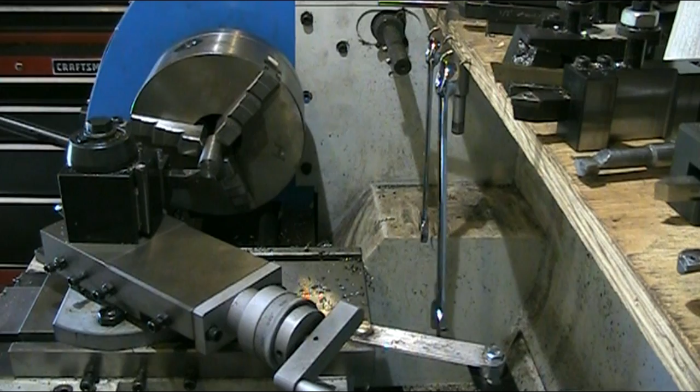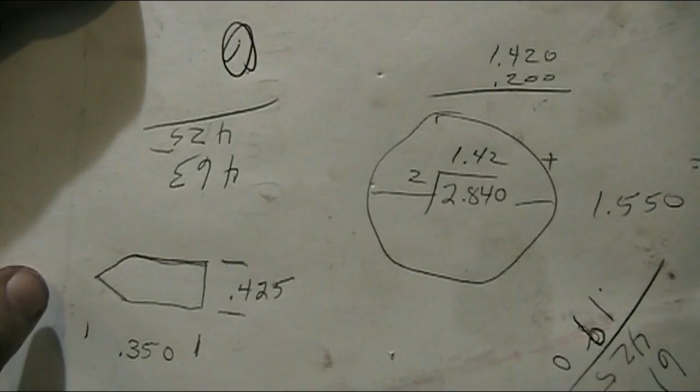Alright, now we're going to make our little transfer punch. I've got the compound set on 50 degrees. That'll give us a good steep 100-degree included angle when we make this. I'll quickly show you what I'm looking to build here. This isn't to scale, but it'll be 350 thousandths long, set down in the hole with just the tip sticking out, so we can transfer that hole center to our top plate. Diameter will be 425 thousandths.

We're going to put that angle on there first, a 100-degree included angle. I've got the camera backed up a little bit, so anyone not familiar with the compound, I have the carriage locked down now. I'll be using the cross slide to advance in, but the compound to actually cut the angle.

I'm moving in about 50 thousandths at a time. I left the diameter the full width of this piece I found in my scrap bin, just so it'll be a little more rigid. I'm actually cutting in both directions. This should give us a point on the end now.

Now we'll get that compound swung back around, which I normally have set at 30 degrees in the other direction. It really doesn't matter. That just gives a good location, seems to be a good in-between point, getting out of the way of the tailstock.

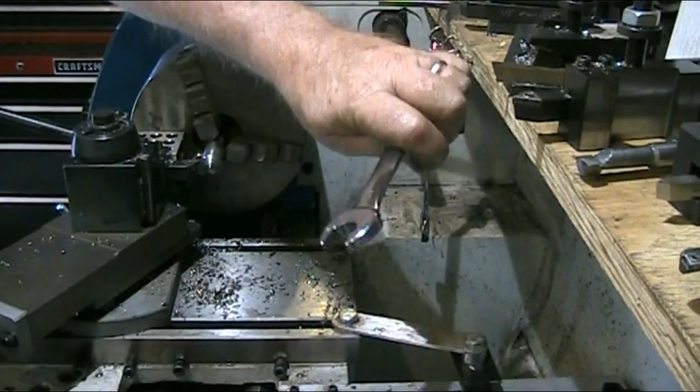Now while we got that loose, I'm going to go ahead and set that so it's perpendicular to the chuck, just using a 1-2-3 block. Now making sure my carriage stop is set where I shouldn't run into the chuck, shouldn't have any crash.

We'll get a small cut now, and then get a measurement and see how much we need to take off total. I'm cutting this considerably longer than it needs to be, just so I've got plenty of ample room there.

We got a lot to go, like it's obvious. That's 675, and we want 425, so that's 250 thousandths we want to take off. I'll zero out my DRO, and we'll take about 50 thousandths at a time off the diameter.

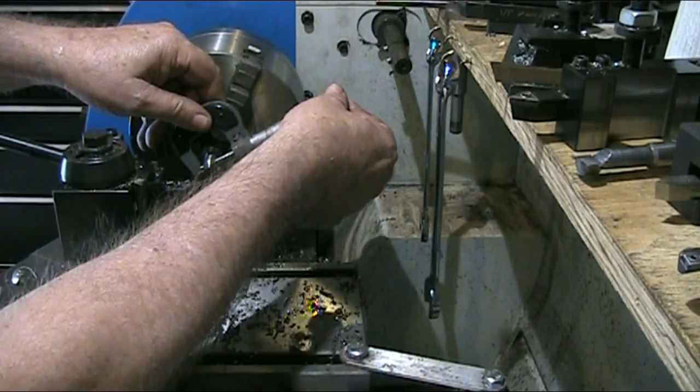I just don't want it too big because it's got to go down in that hole. That's about 6 thousandths over. I didn't think I'd set it right the last time, so... alright, that's 423 thousandths. That's good, that gives a little bit of clearance there.

Now we want to part this off, and if any measurement is crucial, this one probably is. All right, I've got the cutoff tool bumped right up to it. I'm going to zero out the Z.

We want total length to be 350 thousandths, so I'm going to come to 350, and then 100 thousandths for the thickness of the blade. All right, slow our RPMs down, and we'll part it off.

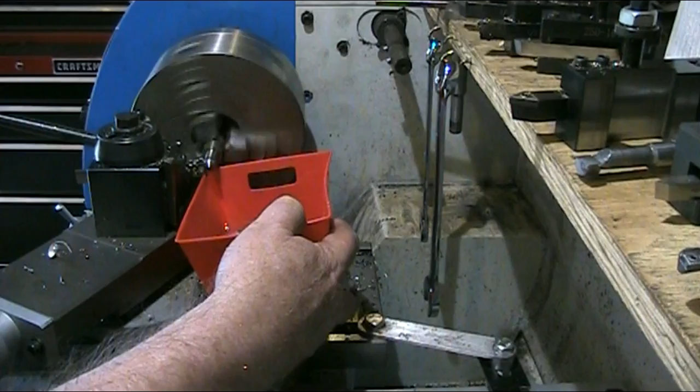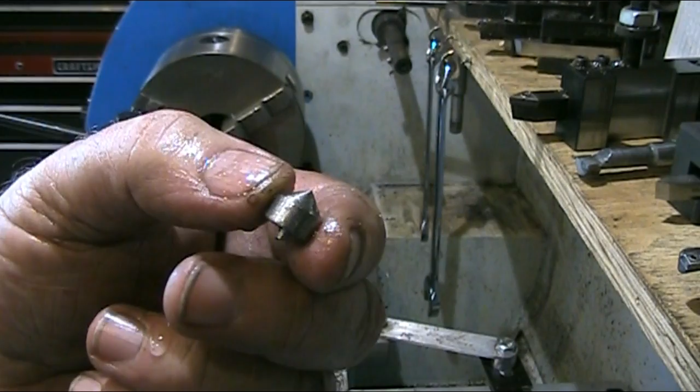Okay, there's what we were making. This will set down in the screw hole with just the tip sticking out, is the plan. That way we can transfer that hole to the top plate we made. That little tip left on there from the parting tool, don't even need to worry about sanding that off, that can go down in the hole, in the actual screw hole itself. This will be riding on the shoulder of the counter bore. So let me get the camera turned around, I'll show you what I'll be doing. I think maybe I got you close enough now that you can see.

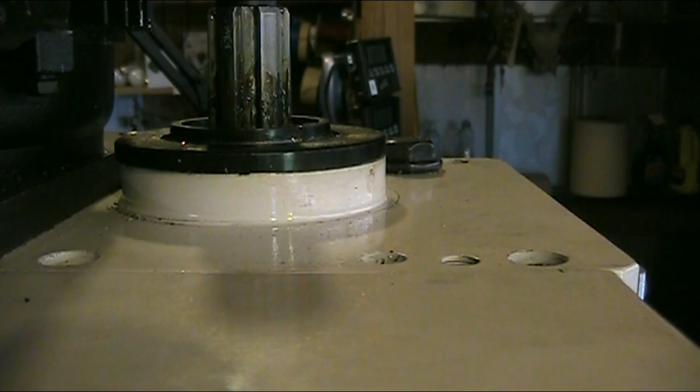Here's a little piece we made. I've got the socket head cap screw out of this hole. I'm gonna drop that in there, and it's just barely sticking up.

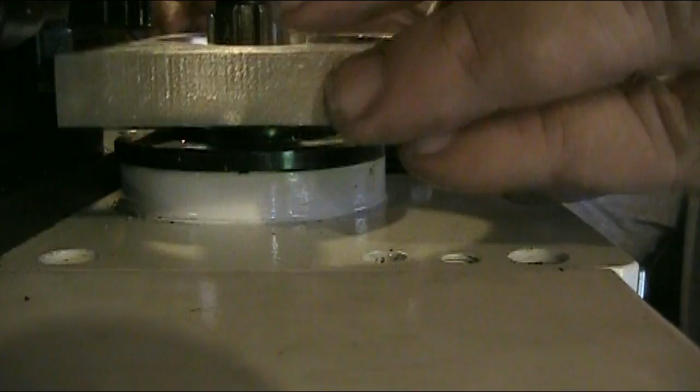We'll put our plate on there and give this a good tap, and hopefully that transferred that hole. Sure did, got a good transfer. Hopefully you can see it right here.

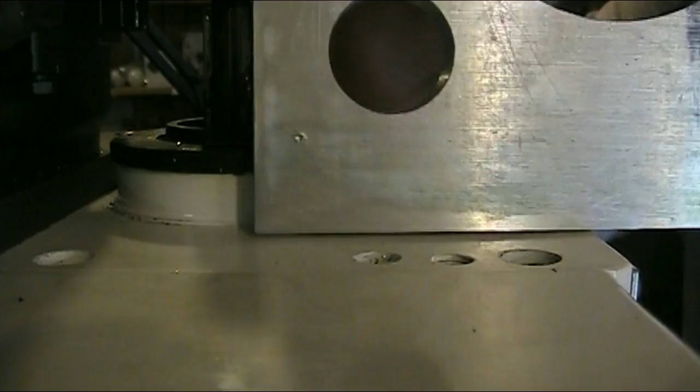Now I'm going to drill and counterbore that hole and continue that process one at a time around, all four.

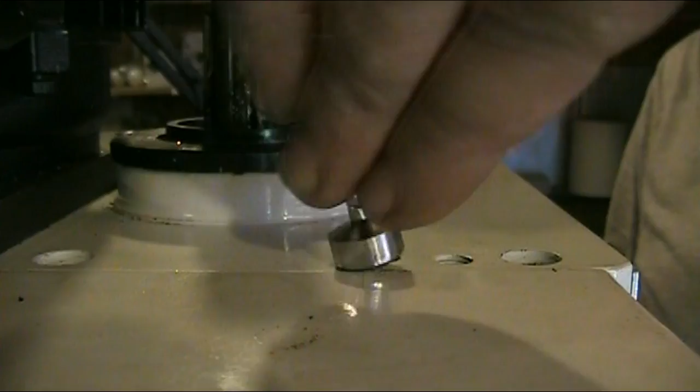Now I'll give you a little secret, see who's paying attention to all the videos. This is the second one of these I made. The first one, I had the intention of getting it out with a magnet. I did not even notice that the material I got out of my scrap bin to make that first one out of was stainless steel. I dropped it down in that hole, and of course stainless steel is not magnetic. I had the dickens getting it out of that hole, but it works so much easier when you use the right material.

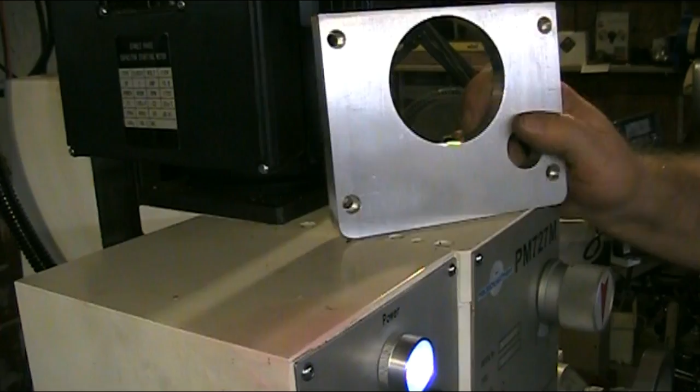Okay, I got all the holes located, transferred over and indicated onto the gearbox plate. Got them counterbored. One other thing I did while I had it out, I eased these front corners right here, put a little radius on those.

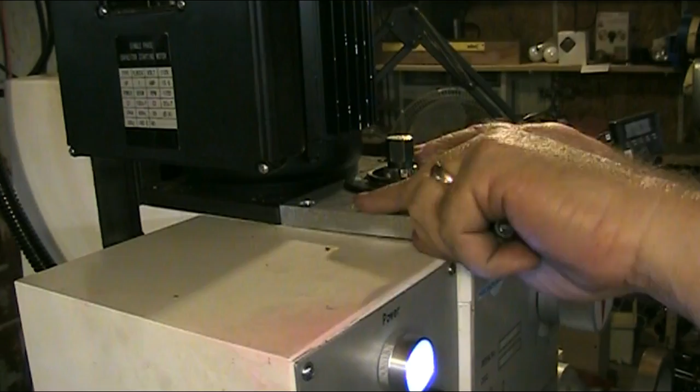I went looking for some socket head cap screws in metric to fit this, but finding metric screws around my neck of the woods on a Saturday, other than very common sizes, is kind of like finding chicken teeth. So it's not quite ready to mount yet anyhow, but it's from this plate right here that we'll continue to build our structure on up for the power drawbar. Everything will be mounted to this plate that we just built.

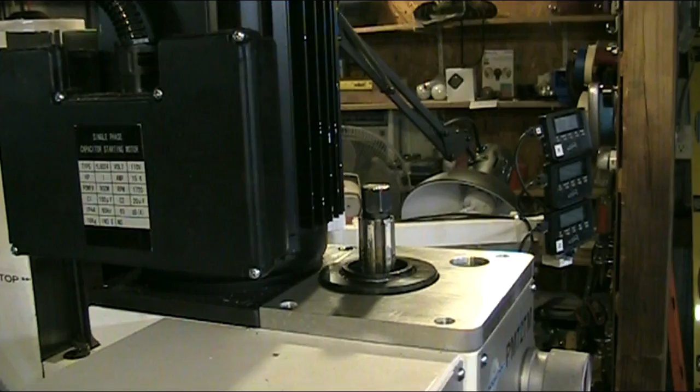Now that we have our gearbox plate finished and mounted on there, the next step, building this basically from the ground up, we need a circular plate or platform up here that all of our sliding mechanism is going to work on, and also our impact wrench will set up here.

As you can see, I got very little clearance right here, and I don't like modifying the stock equipment if I don't have to, but I just don't have enough room right here. So what I'm going to do is take the Dremel and cut these little fins right here off. There's just not enough clearance to get an upright up here.

I've got an extension on the air wrench right now, but the air wrench would actually be sitting down in this area. You can't really tell right now. We got clearance issues at the top as well up here, since the air hookup comes off of here.

We've got several challenges to work through on this, but I don't think any of them is going to be insurmountable. We just got to take our time and plan it out well in advance. These fins are going to have to come off right here, so that we can have a plate big enough to mount our slide mechanism on. There'll be two posts up here that our slide will work up and down on.

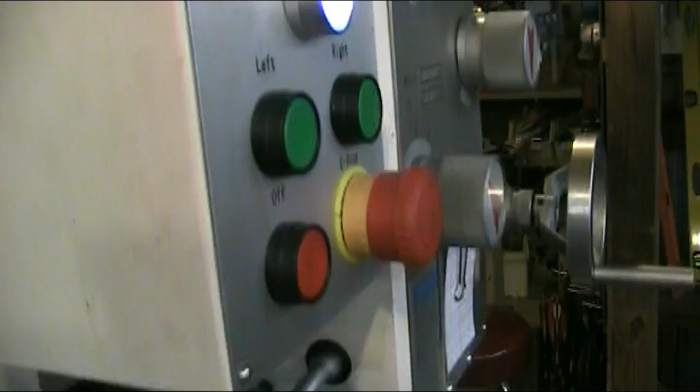So I'll drop the camera back down. I'll be taking these fins off of here, but I'm going to slide the camera back down now and give you a little bit of a drawing of what we're actually going to be trying to cut out here. Maybe that will show up on here.

I want my platform to be 4.5 inches wide. This is the center of the drawbar right here. I'm hoping you can see that okay.

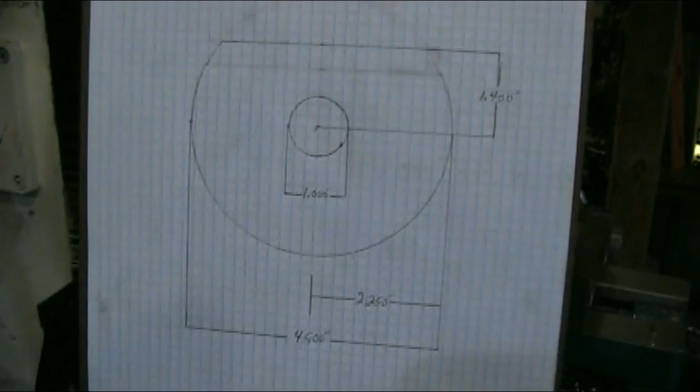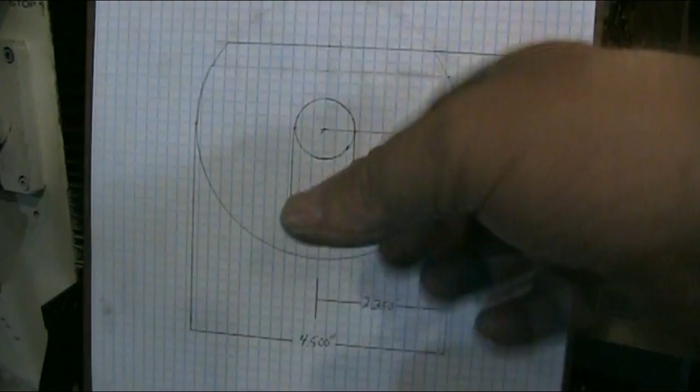All right, this is the center of the drawbar. If I take those fins off, I'll be back at 1.4 inches. If I don't take the fins off, 1 inch is all the clearance I've got. This hole here has got to be approximately 1 inch for the socket to pass through, and the drawbar to come up through if necessary.

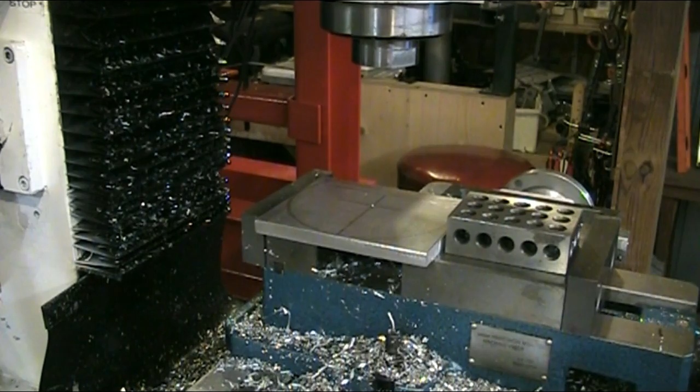So again, gonna make a circle 4.5 inches wide, but we're gonna clip off at 1.4 inches from the center right here. So what I've got in the mill right now is a piece of material. It's got 2 good edges on it now. Well, it's got 1 good edge on the back and a fair edge here, but we're going to see if I can find a...

Little piece of copper wire here, and we'll see if this will stay down. Looks like it. Yep, it's going to want to ride up. Well, that had a chip under it. That might have been what it was trying to ride up. Yep. All right, that should have it down now.

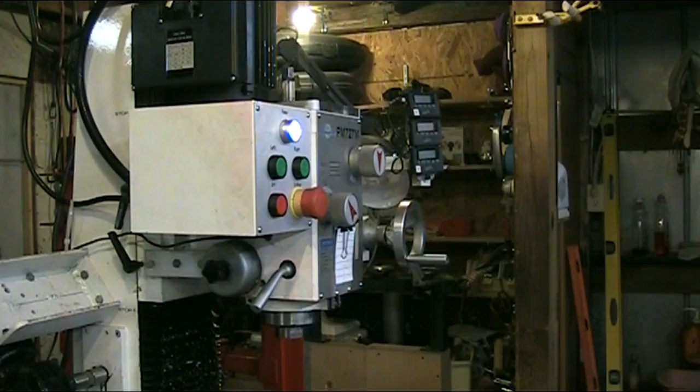For proof of concept, I'm going to handheld this by hand. Let me get the camera back here so maybe you can see what I'm actually doing. All right, I've got the camera backed out a little bit. I had to get some more length on my microphone cable and power cable to the camera, but hopefully you can see what I'm doing here.

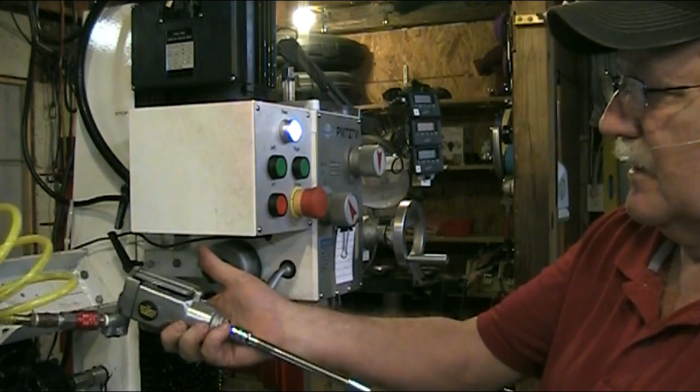For proof of concept, I have my mill, a roughing end mill, my 3/8 collet, and with the extension it's just going to be handheld right now. I have the socket on the extension now on the impact wrench. I'll set that up there.

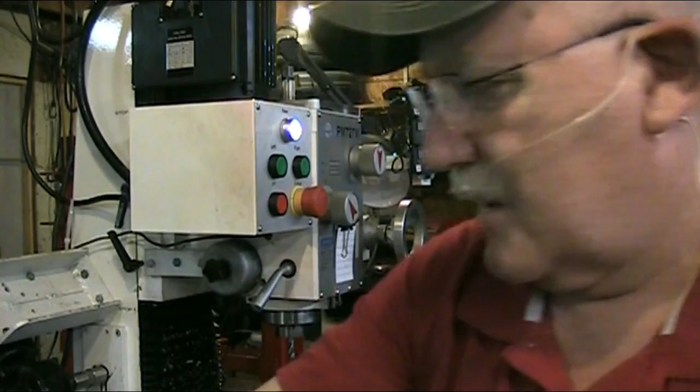Find my notch. Alright, that's in there now. And that is tight. Alright, so I'll leave that like that and see. I'll swing the camera back around to the filming position and we'll see if that tightened it up enough.

Alright, as I say, this is a factory edge right here, but I want to clean that up just enough. It's just got a few dings from where it's been tossed around in the parts bin and so forth. So I want to just touch that off enough. Also, I think I've got a good grip on it there, but we don't want to put too much pressure on it until we can get a better bite on it.

I'll move in just a little bit, tighten my X down. And I need to go down a little bit more on the Z. All right, that cleaned that edge up good.

Now let's come over and we'll get one of our perpendicular edges. I have the circle drawn off on there with a pencil, just to get a close edge. And the only thing I'm wanting to do right here is square this edge off so that I've got two good sides before we turn and cut this 1.4 inches off. This will be the precise cut on this edge right here.

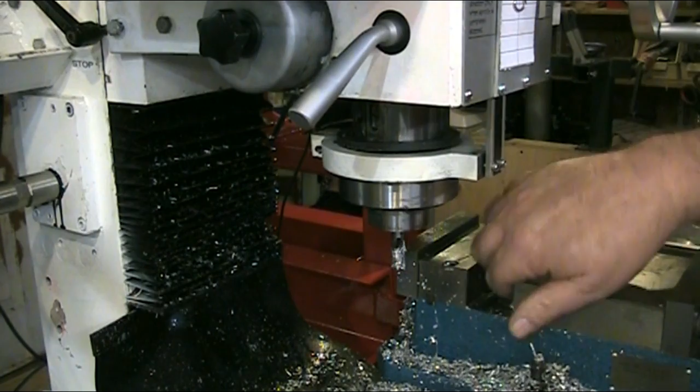Alright, that's all holding pretty good, or real good. Now I could turn this up. I've got the jaws on the outside of the vise now, and I'm debating on whether I want to stand this upright and mill this off, or if I want to just go ahead and put it in this way. I think I'm going to go with this. I've got two flat edges to work with there now that I can get a good grip on.

Now we want 1.4 inches from this center. I've got what's going to be the center of the circle, I've already got that laid out. So as always, I'm just going to get one little skim cut to get a measurement from. I know I've got a little bit to work with here. And I want to go back up on my speed just a little bit. There, I think that's better to cut this aluminum with.

Alright, the very spot I need to measure from didn't quite clean up there, so I'll make another pass. I'll turn my DRO on now. Take about 20 thousandths off there, just enough I know it'll clean up.

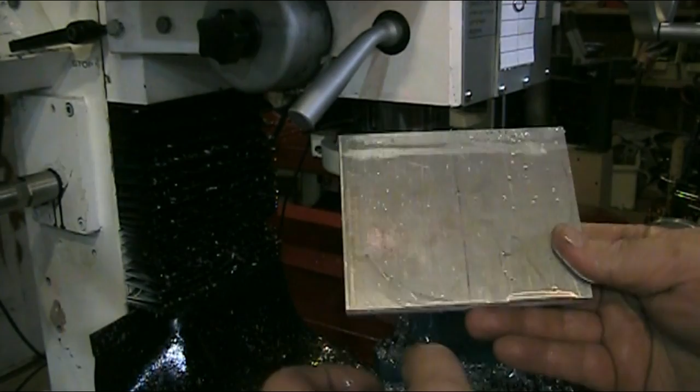Alright, when I get this back now, I'm going to carry it back to the workbench, and with a pencil and compass, I'll lay out my approximate circle before we go to the mill. It will be from this center point, lay it out, and then I'm going to go to the bandsaw and take off some of that corner, some of the big parts, so we won't have quite as much to turn on the lathe.

Alright, didn't think to mention it before I took the material out of the mill, but the impact wrench sure tightened the collet enough to cut this aluminum, and I believe it is probably as tight. I may try it with my hand wrench just to see if it feels about the same amount. But I have a piece, got the corners knocked off on the bandsaw, got it in the lathe now.

If you've watched my other videos, you've seen me do this before, maybe not on a piece quite this big, but I have the tailstock tied up against the work now with my live center in what will be the center hole. I have double-sided tape on the back holding that to keep from twisting. The most force is, of course, coming from the tailstock on that.

But we're going to keep working this down until we get back to our line there, and then we'll start measuring. Remember, we're wanting 4 1/2 inches for the total diameter there. So let's see how this is going to do.

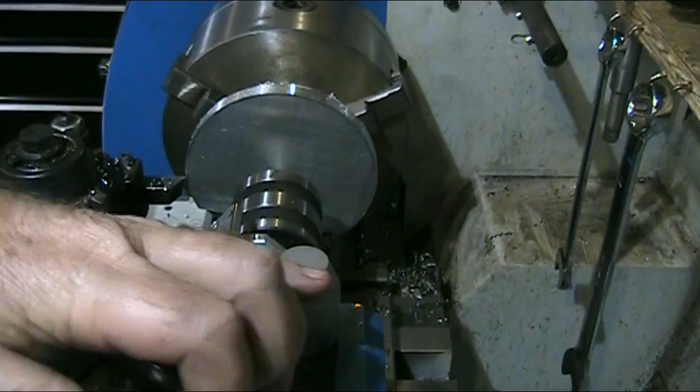When you're doing something like this, we've almost got it round now. But you do want to periodically check and be sure your tailstock is still plenty tight on it, which it is. Let me take one more cut. I'll reduce my speed back down so I get a little better finish.

4 1/2 inches is what we're looking for. And it is not absolutely critical that it be 4 1/2, and it's just about going to be impossible to get the calipers in there. I need a set of left-handed calipers. I've always wanted a set.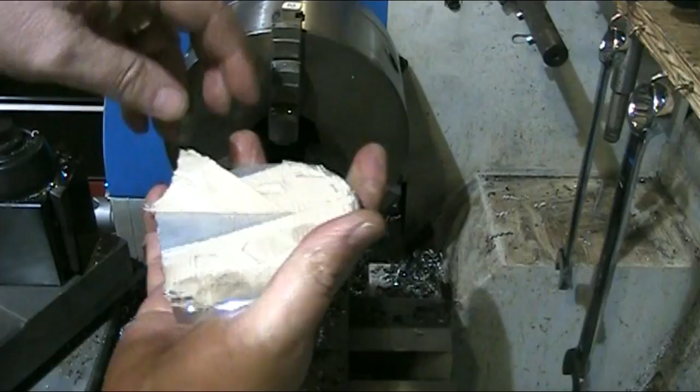Okay, and that did not slip at all. Stayed right in place, plenty of friction on there. So we have us a good round piece now. 3/4 moon maybe. All right, I'm going to go over to the workbench and do some more layout on this, and I'll bring the camera over so that you can see what we've got going on.